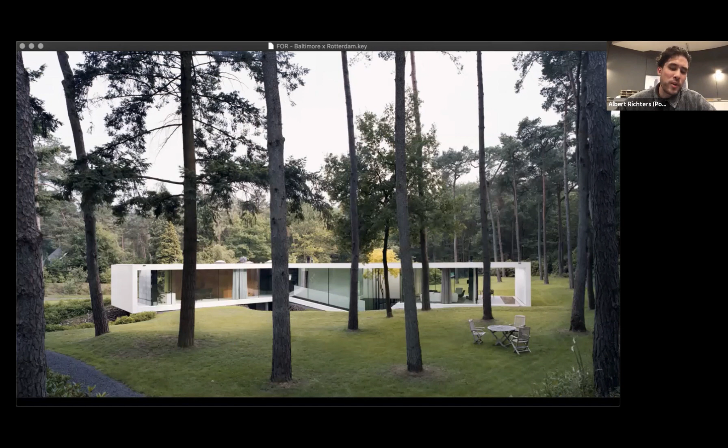We started off when the office was just a handful of people. It all started with this villa here in Holland in the woods. Even though I'm not going to elaborate on it, this villa is actually the start of the philosophy of Powerhouse as a company — that it's not only about beauty, taste and design, but also about how you put it together. This villa was actually the first of those projects where Nanne de Ru was responsible for doing everything from designing to the drafting, the drawings for the builders, and this is basically the project that got it all started.

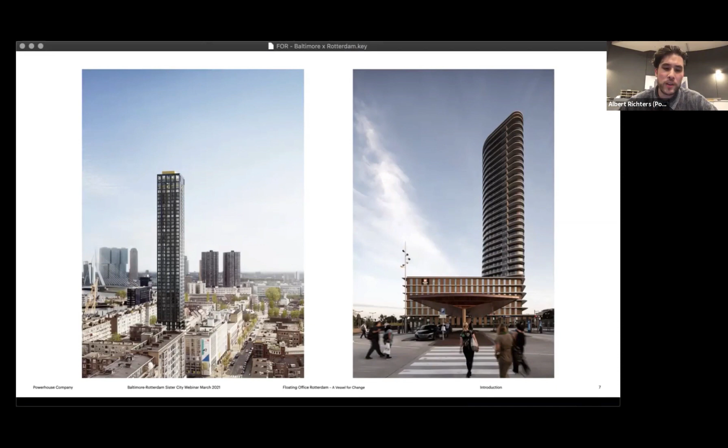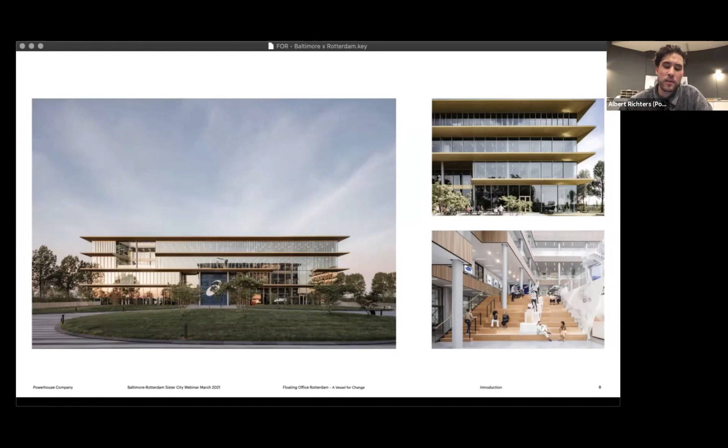Since then, we've been working on all kinds of quite interesting villas, quite interesting projects. But we've panned out, and our portfolio now also consists of inner city developments, high-rise residential towers, bespoke offices such as the headquarters of the ASICS company of Europe near Amsterdam, where this project was conceived in quite a fast way but had to already take into account all kinds of sustainability measures. Now it has been quite a successful project in terms of revisiting what work and the workplace can mean. So in that sense, also a very good and interesting learning moment that garnered knowledge for the floating office in the future.

We've been working on interiors as well for different firms. So basically, we've slowly panned out to have a very diverse portfolio in which everybody works not only on the design, but all the way through to detailing and so on.

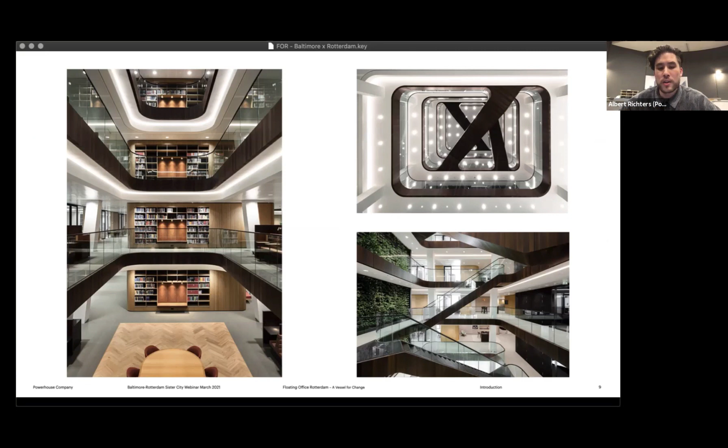Besides that, we also had the great opportunity to work on some icons in places around the globe, such as the Çanakkale Tower that I personally worked on back in 2014. This was done in collaboration with a small architecture firm here in Rotterdam called International Design. To our surprise, we won this project somehow based on a very beautiful painting, inspired basically by a painting of Çanakkale that the mayor had in his room. So Nanne, with his smart thinking, basically thought, well, we have to present it as a painting, and then it will be a success. And so it came to happen.

It led to other kinds of loops, not necessarily based on exactly that same philosophy, but we recently finished the Loop of Wisdom in China, which is actually a sort of information pavilion for a new neighborhood that is going to be built there, which will in the future also house sport facilities and education facilities. So these kinds of icons have been quite important in flexing our muscles in terms of design and also seeing them be executed.

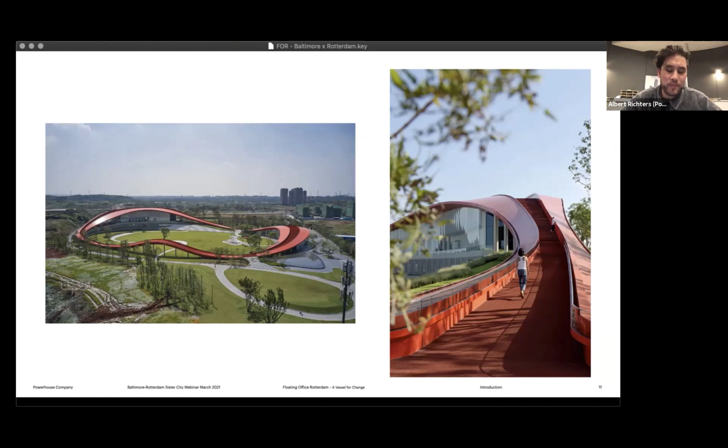Back here, we've also recently won a project for a pavilion in The Hague for the forestry, and it kind of symbolizes somehow the ending of 2020, in which we've been developing a lot of projects in timber.

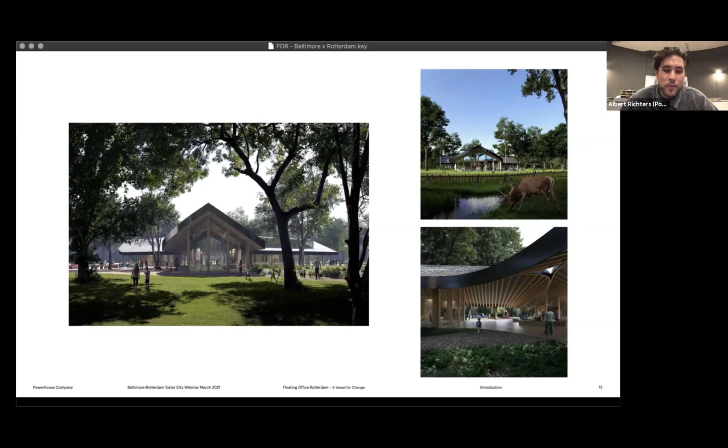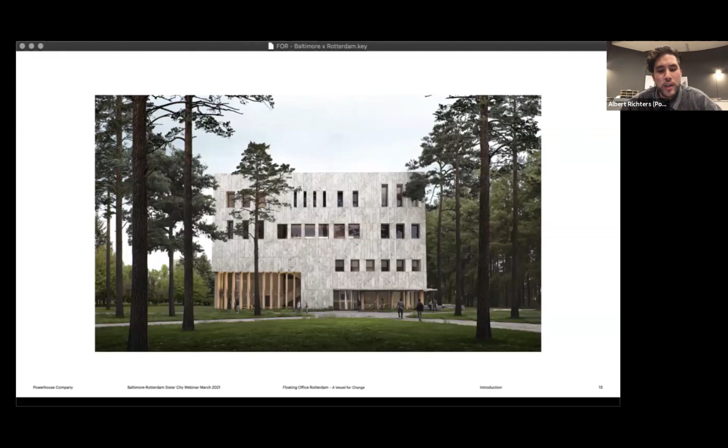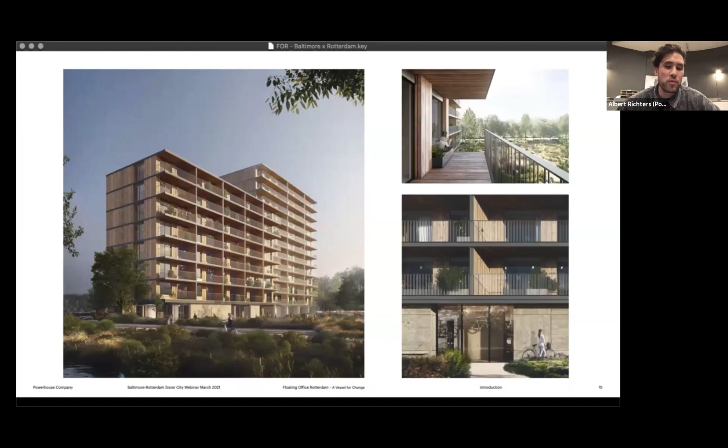And then also we're working on a social housing project that is made in timber. It's basically a refurbishment of an old flat in a neighborhood in Rotterdam, where we basically are using timber to build on top of existing foundations. And here the main discovery is that timber is much lighter than concrete or other more conventional materials, and therefore you can reuse the foundations of a building to build a completely new housing block on top of it, which conforms to all the standards of living. We do it together with a landscape designer, in which not only the living but also the landscape around it are completely integrated as a whole. So again, there's a degree of experimentation going on, and our last year has been quite dense with these timber structure buildings, and I think that's a very exciting chapter that we're now entering. Something that is also new to us, to be working with this very new material.

Going back here, as I said, this whole team, we're all doing it together, and it consists of not only the designers, but we also have all the draftsmen and all the engineers in-house. So apart from having advisors on board and consultants for the different technical aspects of building, we in the end make sure that all the shop drawings get made, and I think it's quite an amazing feat that we are able to do that, and it also keeps us on our toes. Vice versa, as an engineer or as an architect, to keep in mind the certain stages of a project and how these stages come together, basically in keeping with the philosophy that got it all started, way back when the Villa 1 was built, the white one we saw in the forest at the beginning.

Anyway, moving on to the project. I actually wanted to put the project in a much larger context. So we're now going to be zooming out a lot and then zooming back in. I will get to details, don't worry.

But I just wanted to start with, since we're talking about the sister cities, a quick comparison of Baltimore and Rotterdam. And what I found quite interesting is that if you look at the current cities now, you see somehow a similarity in atmospheres where the former harbors have turned into recreational spaces, recreational places, symbolizing how the cities have grown, the harbor functions have developed and perhaps moved out or have shrunken or grown in a different way. This brings with it a kind of renewed thinking of water and the city, and the heritage of the city, the history of the city, and how we deal with that and what that could mean within city life.

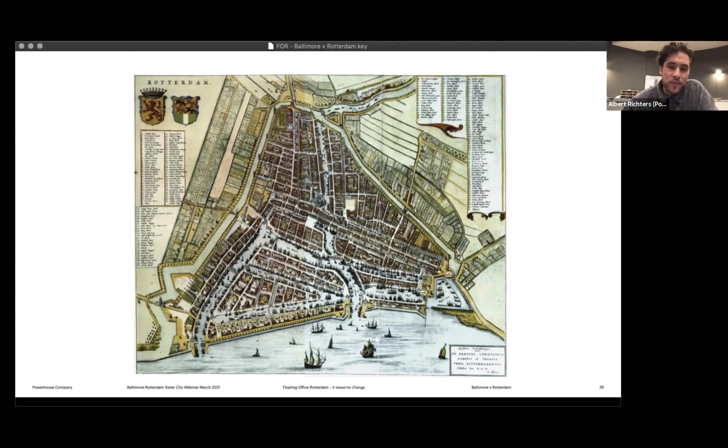So moving back here, Rotterdam was much smaller back in the day. And if you overlay it with Rotterdam now, basically on the top left corner of the old map, you find the central station, and then this twisting Maas River running along the south side of the old center, which is basically now completely part of the city.

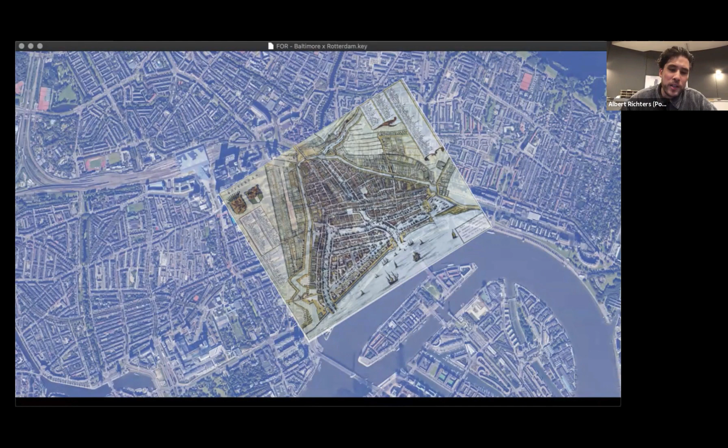And if you zoom out further, you find that the city has grown quite considerably to the south. So what that means is the harbors that used to be part of the city, now embodied by the city I've just shown in images, are much smaller than the harbors you see now. For instance, on the lower part of the screen, you see two big basins.

One of them is called the Rijnhaven, the northern one, which is this following image here. So to your left, you see the Rijnhaven, and this is basically the location of the floating office that I'm going to discuss. What's important about the Rijnhaven is that it's actually along an axis of city developments. As I mentioned, the city grew all the way down to the south.

And the south, in terms of amount of residents, is much larger than the north side. It has its own center, but they have not necessarily been connected that well, obviously because of the huge river and the water and the harbor functions in between that have only moved out quite recently.

But now the city has this vision, the so-called high-rise vision, that is trying to tie the north and the south together. And what that means is that the Rijnhaven, located right in the center of your screen, becomes a new center in itself and becomes a new place, a new development within the tissue of Rotterdam.

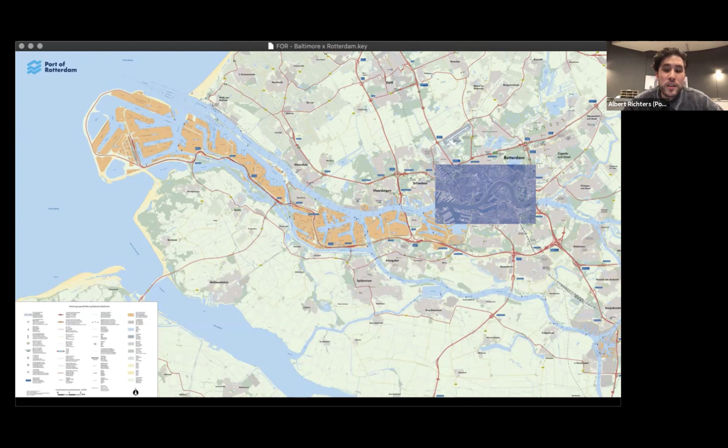And it's even growing, and even though it's not anymore the largest harbor of the world, it's still trying to profile itself as the most high-tech harbor, the most innovative harbor.

At the same time, still having this relationship with the old city, and the old city still having to deal somehow with traffic that goes back and forth from the freight terminal. So the freight gets transferred to smaller ships, river ships, and the Maas is still very much and very intensely used for the harbor function in the end.

And that's, I think, something that is a bit different when it comes to Baltimore, because this whole Maas is a very long river that still has to function as an important port. And at the same time, there's this whole sense and movement of how the city should basically be.

First of all, it should deal with the local ecology. As the harbor grows, there's more questions about how the harbor deals with water, how the harbor deals with nature. And at the same time, as the harbor moves out of the city, there's also a lot of question about what do we do with these remaining harbor functions, or the remaining basins that now become new spaces for living, new spaces for recreation, and obviously new spaces for nature.

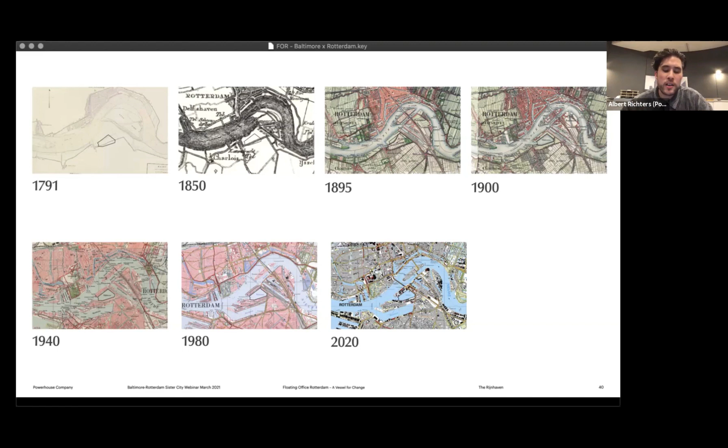What is interesting about it is that it's not a basin with parallel quays. It actually has a different shape, as you could see in the previous image, and this different shape, where you don't have parallel sides, makes it a very interesting space as an urban space.

With the new ambitions of the city, not only to grow south but also to integrate nature and city life into this new zone, the Rijnhaven is a very interesting space, because it's not only a new scale for the city to encroach onto the former harbor function, but it's also basically a new testing ground. That's how this whole GCA, the floating office, fits in.

At the same time, it has also been a place of innovation for a long time. After it was dug out, it was basically the first electrically driven harbor in Rotterdam, or actually in Europe, which was already an innovation.

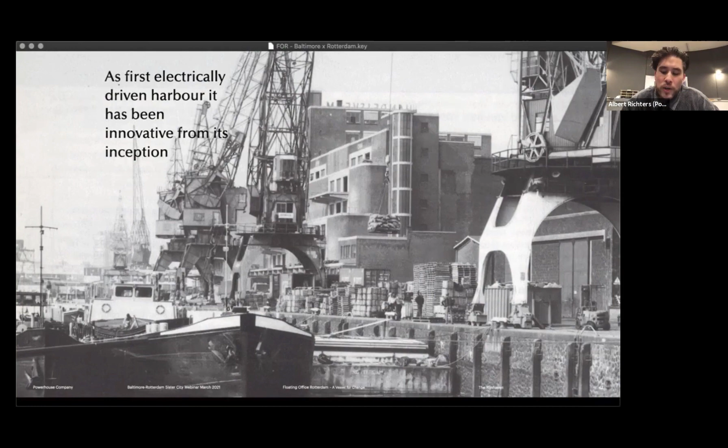This started in the 90s, and something that was maybe less taken into account was how to deal with this large scale in regard to the tissue on the ground, what happens at the ground floor levels and the urban life. Since it was a completely new frontier for the city, there was a lot of architectural experimentation, but not necessarily a good connection with what is happening on the ground floor.

That's something that is now starting to change on the other side of the Rijnhaven, where you have, for instance, the Phoenix Lofts, built on top of an old storage building. In the development of that project, there's been much more attention to not just building a huge amount of housing and then thinking about the public space, but doing that all together. So this area, even though it's maybe not yet a fully fledged center of Rotterdam, is already a place where new experiments and investigations are taking place on how to deal with city development as a whole.

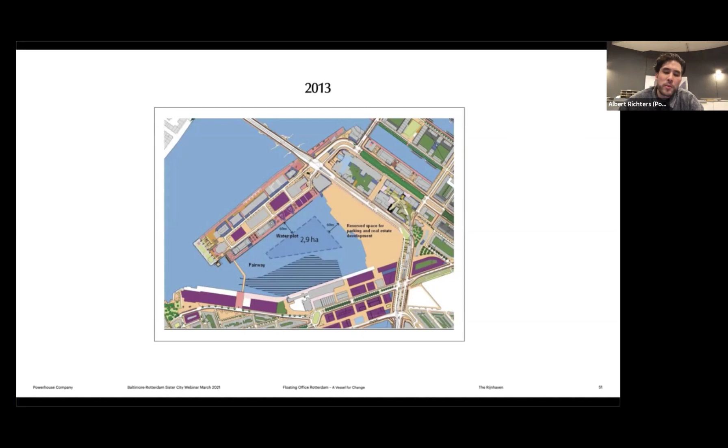But the ambitions for this place are huge, are large, and are about making it part of the city again. So how does that happen when there is this one factory that kind of blocks development because it's still functioning as a harbor? That's kind of where the situation now is, but where we also played a role.

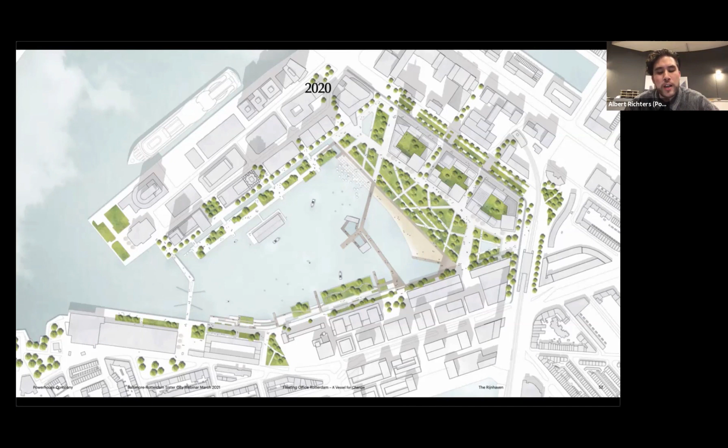So as you see here, this is the final master plan that was presented last year for the Rijnhaven, quite ambitious. It follows the idea of coming closer to the water, integrating nature and making for a livable space surrounding the harbor, and also being able to add large-scale developments surrounding it, to deal with the stringent need for housing in the city.

Then there's the GCA, as I mentioned. The GCA, as was already explained by Rachel, is the Global Center on Adaptation. It was initially started by Ban Ki-moon. It was a result of a collaboration with the Dutch government and the United Nations during the Paris Climate Summit, where the Netherlands decided to initiate the Center of Adaptation, formerly known as the Global Center of Excellence on Climate Adaptation.

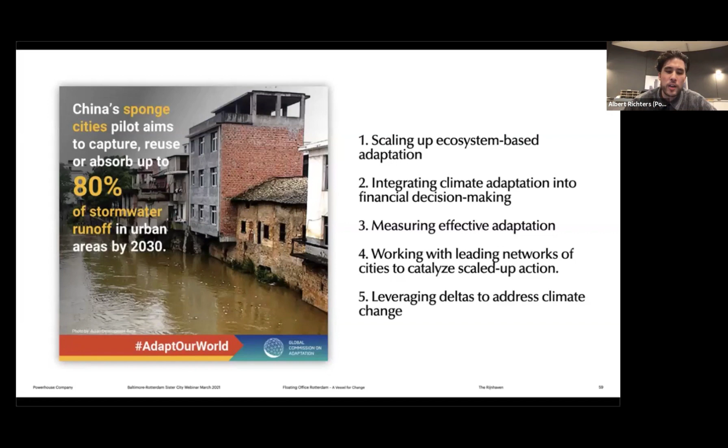Last month they did a climate summit, but basically they have these five ambitions where they want cities around the world to work together to exchange knowledge, and they do it with lots of partners. They have research papers, and basically it's sort of a knowledge sharing center where solutions or problems are measured and dealt with through this central headquarters. At the same time, they try to find partners, financial partners but also governmental partners, to create a network around the globe in which climate adaptation or resilience is put on the agenda as much as possible in policies and all kinds of things.

So in a way it makes a lot of sense that Rotterdam did this bid to attract them to the city, following what I just explained regarding resilience, nature, and so on. They won the bid together with Groningen, which has the Energy Academy of Europe, which is more of a research-based center where innovation and research take place in terms of adaptation strategies. So together they won this bid, but they also got the promise of having a floating office in Rotterdam.

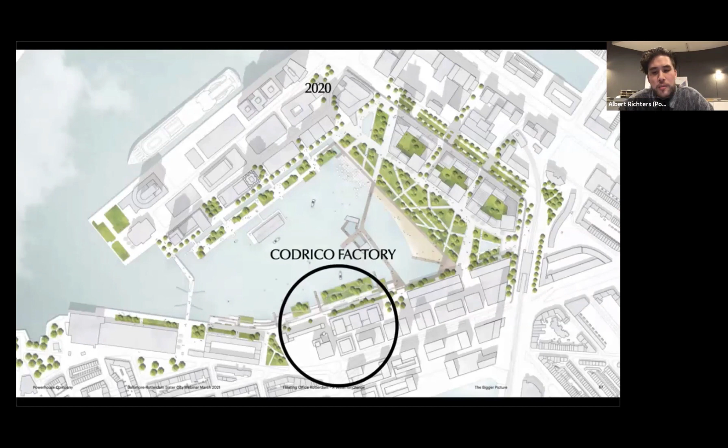And then there's Codrico, which I mentioned before. That's this factory, and it's actually another master plan within the master plan, a vision that we have been working on as Powerhouse. It consists of this one remaining factory that is still functioning. It's basically a factory that does all kinds of things with corn, for cereals, for pet food, all kinds of uses for corn.

You wouldn't expect it to be the case, but this factory is quite high tech on the inside. But as you can see, it is quite an old structure. It actually comes all the way back from the 1930s, if I'm correct. Part of it is even a listed monument, and then slowly it has been expanding as a factory. The fact that it's a monument also means it has to be preserved and taken seriously as a building, because as you can see, it's a very iconic building with an iconic presence in this harbor.

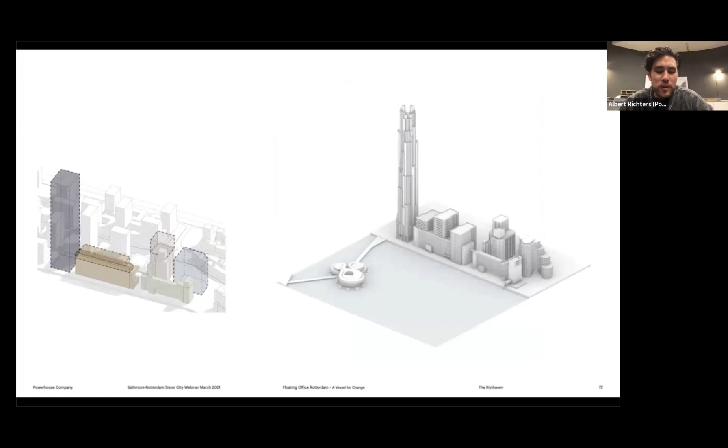So we've been working on this master plan. I will not go through the details, but we've been working on it basically since 2017, so already for over 3 years.

As I mentioned, it's the one remaining factory that will fulfill the ambitions of the municipality of being able to have this promenade surrounding the harbor, making it an integrated part of the city. So they needed to come up with a strategy in which the factory could move out in order to unlock the full potential of the Rijnhaven.

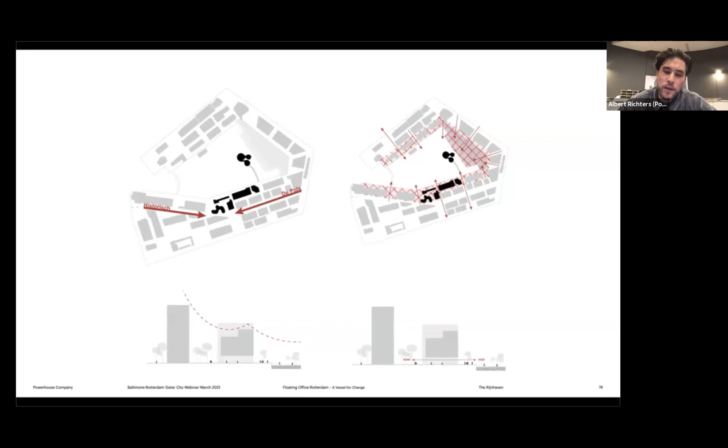We worked on that development, which is a new frontier where an old part of Rotterdam is going to be part of the city again, south of the Maas, that expanded hugely the moment Rijnhaven was dug out. It was the first settlement, the biggest settlement of Chinese in Europe, in the beginning of the previous century. It has an old center, but was also placed right next to quite heavy industry.

This is what the vision now looks like after we also played a role in it. Pretty much in the center of the screen, you see the Codrico master plan in the model. But how does this connect with the floating office, you might think, because it might seem I'm dodging the bullet—but basically this is the issue.

We've been working very closely with the municipality. We've had many workshops with them throughout these past years for the Codrico development. In doing so, we've gotten a good feeling of the ambitions of the municipality, what they're looking for. And since we've been in close contact with them for this development, it has strengthened our network with the city. But this network is actually held together not by architects, we wish.

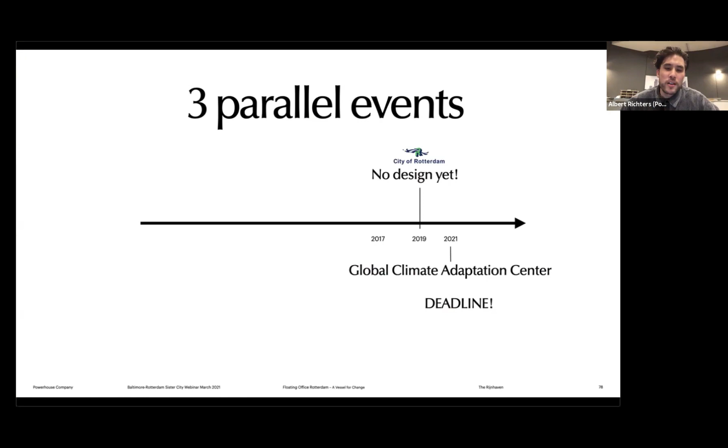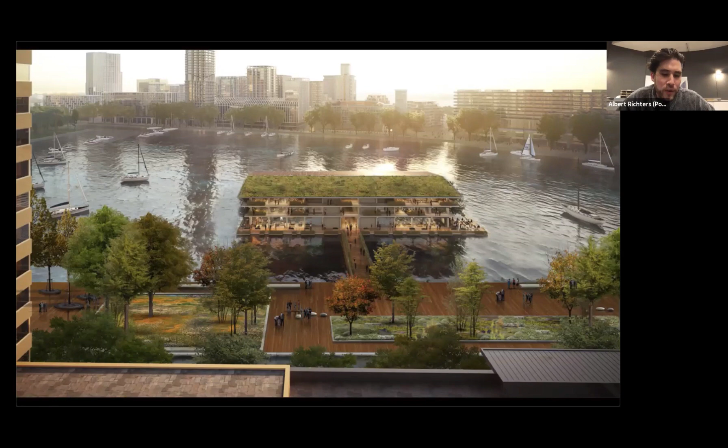Sorry, I'm flipping back and forth. So that brings us to the floating office itself. Here you see how the floating office is attached to this green boulevard, which is also going to be floating. This is a first impression of how the city is coming onto the water, where the height difference of the quay, which fluctuates between let's say 2 and 4 meters, becomes much more tangible and reachable because of floating structures around the Rijnhaven, with which you can sit on the edge and touch the water. Something that has proven very difficult in Rotterdam, and something that is very needed within this bigger vision.

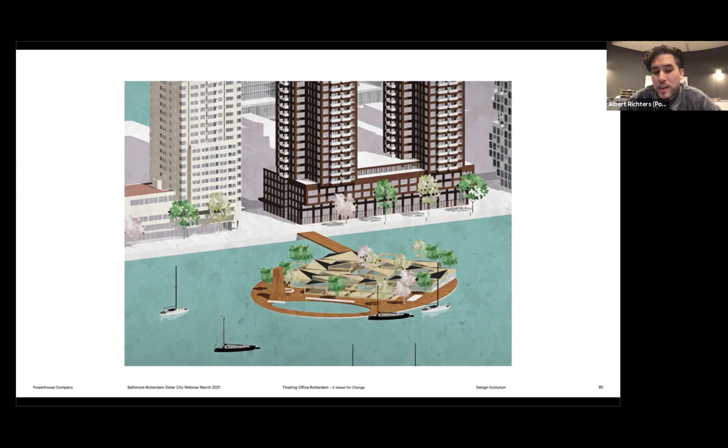But if you see the next slide, which is a completely different proposal, the follow-up proposal of this, you notice that the architect part is not yet the most essential part of this huge culmination of forces, basically.

As you can see, it could have been this, it could have been that, and they would have been happy with it. It all comes down to schedule, it all comes down to organization, and it all comes down to trust in the organization to make something happen.

Whether it's this design or the other design, at this stage didn't really play a role. That's why we could come up with something completely different, such as this, and they would still be kind of happy with it.

The reason we came up with this is because we had to get it floated into the Rijnhaven. It's quite funny that this process went so fast that we only had a few initial sketches for this. These were sketches drawn up very fast to just set the base, the basic idea for the concept, for the design. But it actually is at the core of what became the floating office in the end.

So here you see the necessity to be able to float the building in and out of the harbor, and that has to do with the fact that the agreement with the municipality is that this is a temporary building, that it will not necessarily remain in the harbor for an extended period of time, but let's say for now it's a 10-year period. But also, since it was floating anyway, and since it had to be a floating office, we needed to be able to transport it.

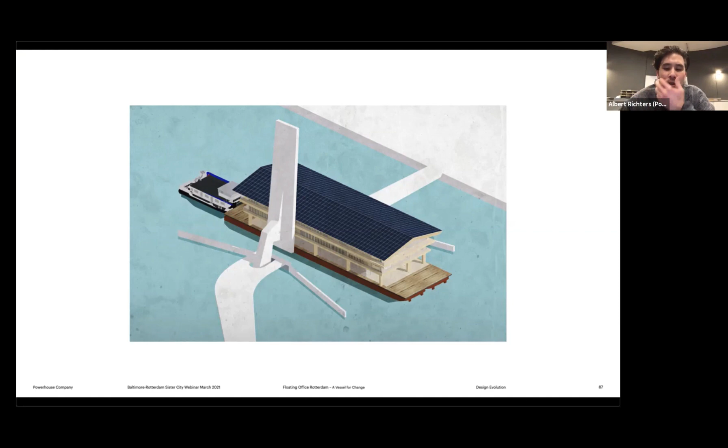But thinking further on that note, you see that it's basically being placed on old steel barges. The whole idea back then was to make a kind of foundation of old push barges that are being used by the shipping industry at the moment, and then use that as a foundation. But that dictated a lot for the design, in the sense that these push barges have certain dimensions, certain standard sizes, and so on. So that was maybe a sort of clumsy, or a naive first thought of how we could deal with this floating structure.

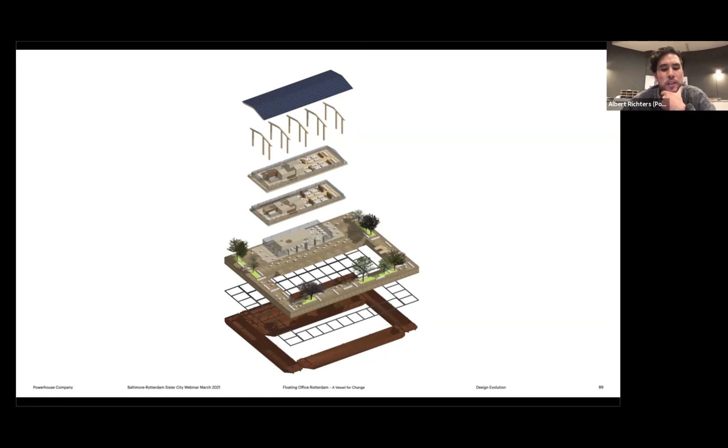In the end, this is what it looked like, and as you can see, it felt like a longhouse, a wooden longhouse, light structure on top of this big terrace.

And in it, you already find some concepts that then in the further development of the design took place. So what you see, for instance, is the length, obviously, so that it could pass through the bridge. That's a given. We see on top, on the roof, the idea of having solar panels. That's actually the main reason to pitch the roof, not only to give it a friendly presence, but also it helped us angle the roof towards the south sun.

We wanted to have that roof as a sort of full solar panel, edge to edge. So those are initial ambitions, as well as the tapering of the floors. You can see also in the elevation, floors tapering out. So the farther away you are from the public spaces, the more balcony you have, so to speak. At the same time, the balconies help to control somehow the climate within, since it's quite a glazed building, something that you already saw when I showed the ASICS headquarters, the fact that basically we wanted a very light, transparent, and open building that needed to deal with sunlight and so on.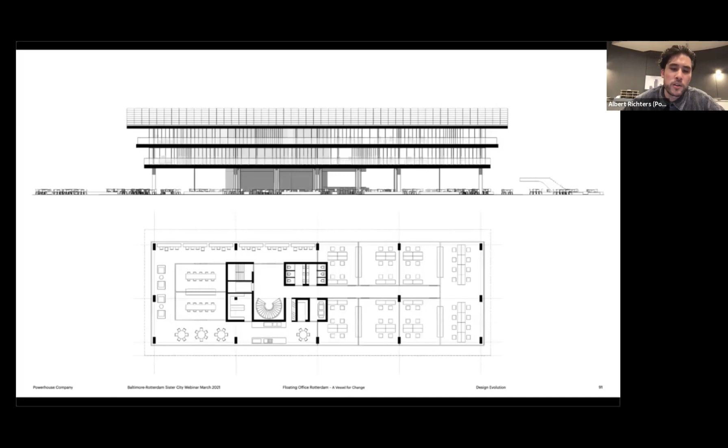And back then we had this sort of interesting roof shape. We thought that the roof shape was the iconic part of it. The roof shape had to be this sort of slick and high-tech wing. Those were sort of initial ideas that we were thinking of back then. Not a lot of columns, as you can see, huge spans, but also a little bit random, you could say.

And this you can see also when you look at the design, there's many things going on, and maybe you don't see it yet because this is the first impression, but I definitely see it. As we go further, you will see how this design evolved in order to become stronger in its presence.

But we were looking for something, even though it was floating, we wanted something elegant, something with a very representative presence, since it was going to be the headquarters of this very representative organization. One of the things we always came back to, and I think one of the inspirations, is the house along the party wall by Herzog and de Meuron. Using wood, and maybe also because it's one of our first projects in wood, we wanted to explore how to make this wood really be the star of the show and the defining element for the building.

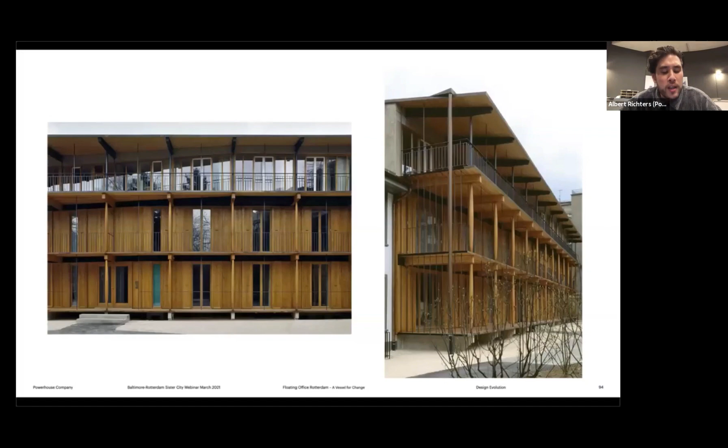I think this is one of the references that came along during the design thinking process, where we thought that this kind of putting together of elements was a very important aspect for the building. Thinking further on that, you'll see that because of that, the design slowly evolved.

Here I show you a previous design where we have this sort of sleek roof. I mentioned it was a bit random, so we thought, let's bring it down to its core elements, where we talk about a frame of wood and glass in between. That led to this design iteration, in which this frame would be a sort of super grid on 3 floors, very emphasized not only on the inside but also on the outside, still maintaining the concept we initially had of this long, elegant gesture.

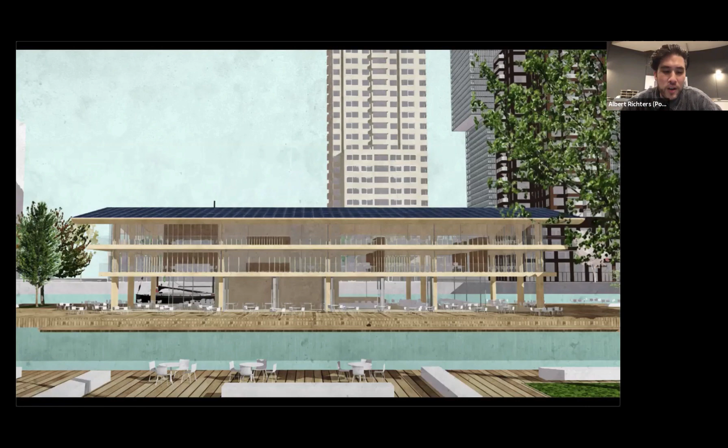If you compare where we started and see the evolution, you see how much stronger the design got—at least that's how I think of it, but I'm curious to know how you see it. Obviously there's a change in render styles here, so we should look past that. But I think the presence got much stronger because we brought it down to its elements.

You see how this translates into a 6x6 grid on the interior, which might not be the most conventional office interior, but it gives a lot of neutrality to the space, and because it's so neutral, it allows for many different uses. The lines may not be that clear on screen, but the grid allows for a nice, elegant space and flexibility. And because it's slightly bigger than your conventional office grid, it also feels more generous.

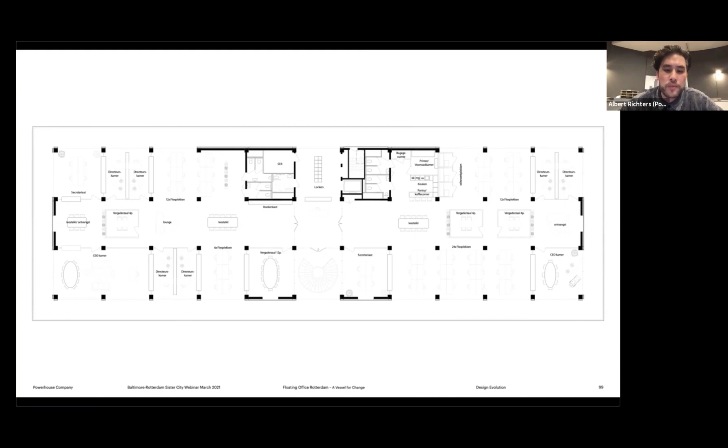The funny thing is that around that time, I had a school trip for TU Delft to Vienna as a tutor. This was the first time for me to experience the tiny Loos bar, the American Bar in the center of Vienna by Adolf Loos—a bar of 4 by 6 meters, literally, and that's all you see. But it seems much larger because he finished the top half of the walls with mirrors, and in a very intelligent way placed this grid structure made out of natural stone and marble. It's really quite spectacular over this small space, and the effect is amazing—you feel like this little cube in a matrix, an infinite grid that makes the space feel so much larger.

Even though our building is completely different, it's funny that the moment I experienced this space, I felt super convinced about using this grid in our building too, even though it was a completely different purpose, a completely different situation, and not introverted at all. Just the fact that this grid was so strong here gave me the confidence to go for it in a building. It's funny that these two events—this school trip and this design process—went together in that moment.

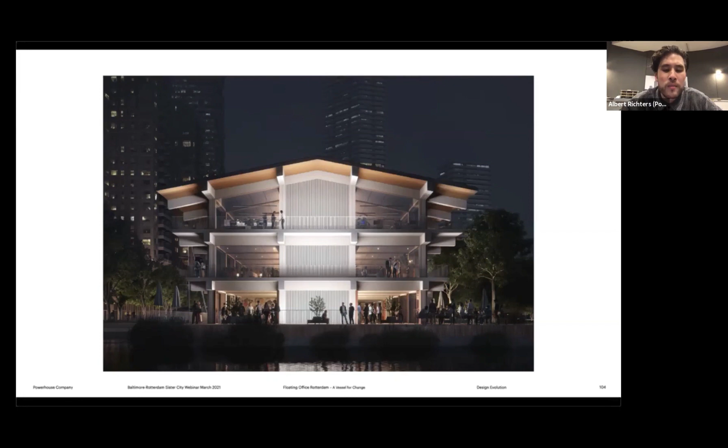And what you see also is the use of symmetry. Symmetry is a thing that happens not necessarily from an aesthetic point of view in this case, but definitely from the point of view of the fact that it floats. The moment the weight is not distributed evenly or symmetrically, you have a lot of technical issues to deal with regarding the weight and how the building floats. Of course, we don't want a slanted building, so you would need to add ballast, but that ballast is actually dead weight you don't really use. So symmetry was always not only an aesthetic choice, but it made sense for this particular purpose.

Here we see some details, basically the section of a floating foundation of concrete with the grid structure on top. I mentioned concrete now, whereas previously I mentioned steel barges. I also mentioned that steel barges were difficult to use because you need to maintain them - they need to be pulled up onto the shore every few years for inspection. And obviously, if you're using second-hand ones, it's never guaranteed that they will actually be proper enough to hold such an important building.

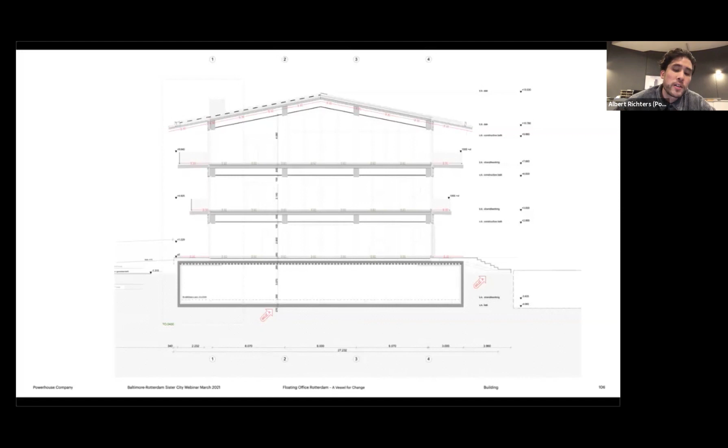So with a little bit of pain in our hearts, we decided to go for concrete, but we also discovered that concrete had a lot of potential in terms of climate management for the building. These concrete barges, which I will soon show you in a video, have integrated within them a whole tubing system that makes sure the temperature of the water is transferred into the cooling of the building, and therefore can cool the office functions. With offices, the cooling load is usually much higher than the heating, the temperature load of cold air, because you've got computers and people there, and that's why cooling is much more important. When you look at the yearly schedule, cooling of the building is much more important, and therefore it made a lot of sense to use this concrete foundation as basically a heat exchange for the building, and that's what you see here.

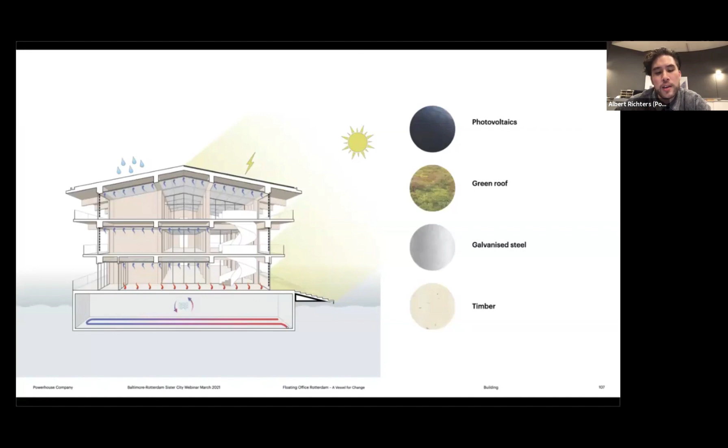This, in combination with the timber, which is produced completely sustainably in Germany and then built on site - it's prefabricated in elements and then put on site - in combination with a vast amount of solar panels, makes it a completely energy neutral and CO2 neutral structure, as well as having a very friendly, warm presence seen from the water side.

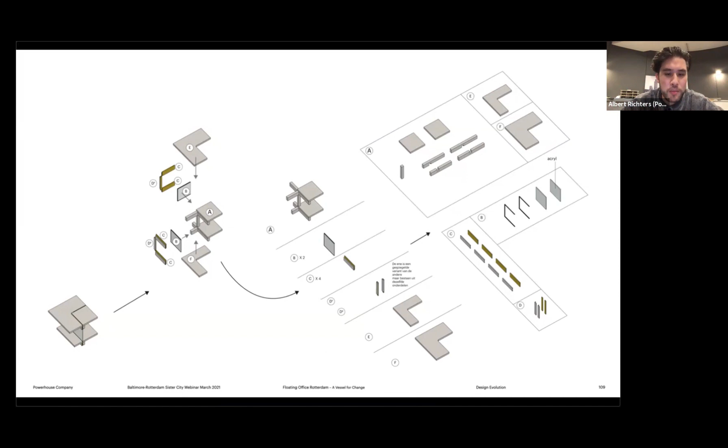And then again, here we have a basic sketch of how we were thinking of putting these elements together, where you have a sort of core structure. And then on the core structure, you make windows with bespoke frames that you then clamp with facade elements, cladding onto that structure. We wanted to keep it that simple, and in the end you'll see that we managed to do it like that. This is one of those detailed drawings I made way back when we were thinking about how we think of these details, and how we think of putting the building together.

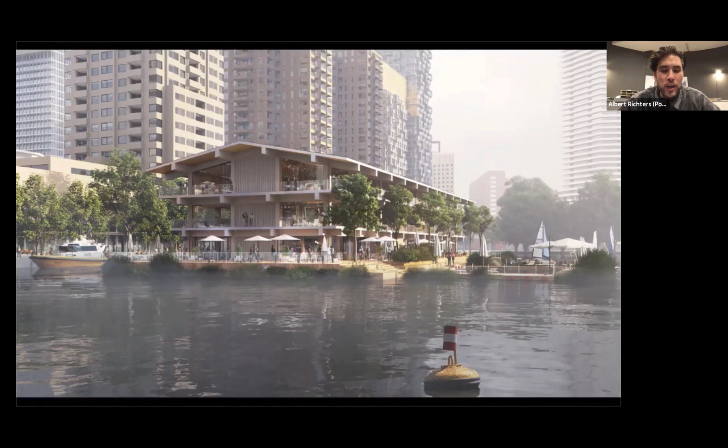And here you see the scheme again of all these layers stacked on top of each other, on top of this terrace that arrives at the water, making it quite a presence on the water, but at the same time still somehow this island where you can have a much closer relationship with the water, on top of the fact that when you work there, you can still go outside on every floor and walk around the whole building. That makes it a very friendly and welcoming building.

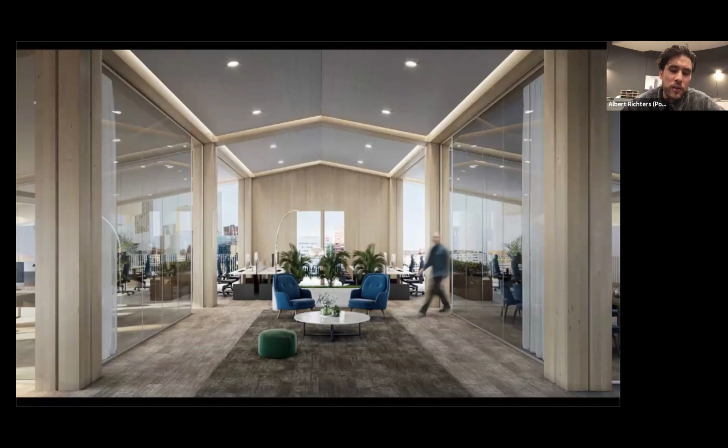And what we were looking for in the interior is - instead of actually, I think one of the interesting discussions we had when it came to the interior is, do we have tables that come up and down for people that want to work standing or sitting?

Or do we work smartly with the spaces, creating variations where you can actually move when you're working on a laptop, where you can work on a standing table or sit in a sort of cafe atmosphere. We were rethinking this in a way of being down to earth about what work means in such a building, rather than focusing on gadgets that only solve minor problems in what it means to be working in a space like this. I think that's an interesting given about the workspace.

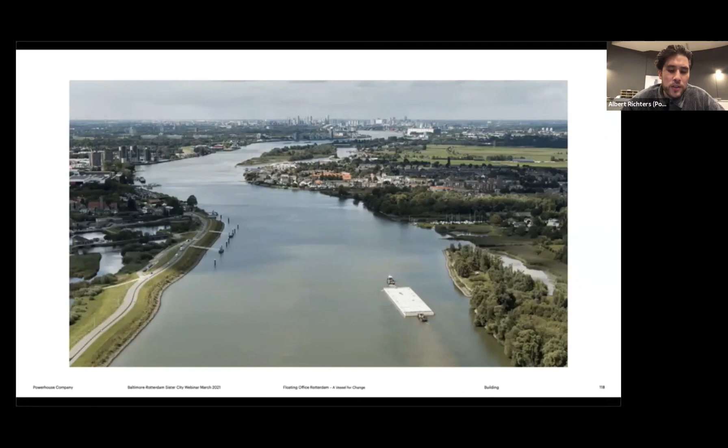So last part, the building itself. It's getting built now. We started this end of 2019, and now the building is already quite advanced, as you will see. It came with a degree of tension because, as I mentioned, we needed to get this office, this floating island you could say, into the Rijnhaven. So I'll show you a little clip of how that went.

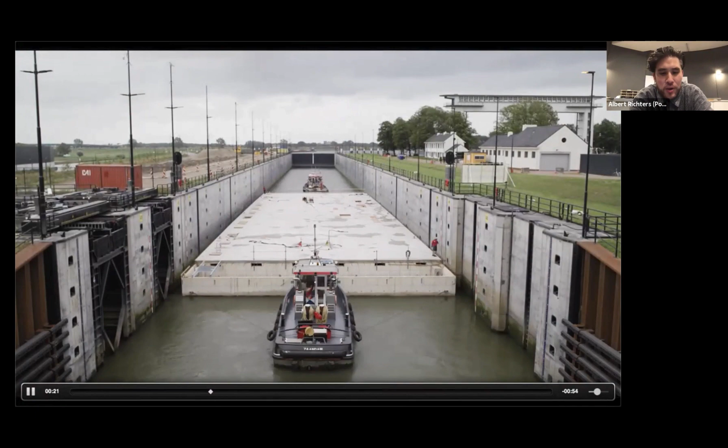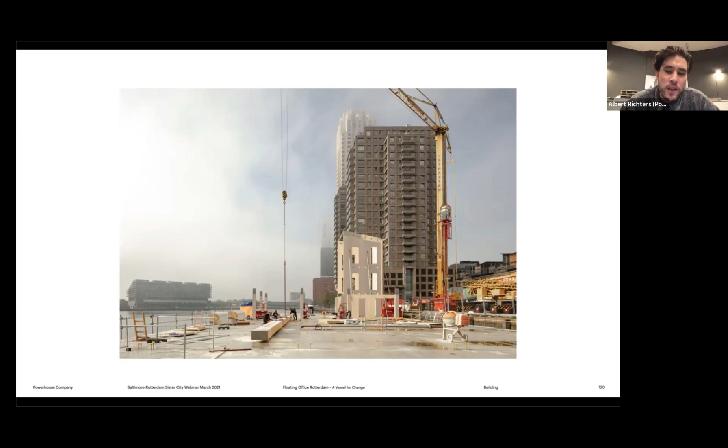And as you can see, once it came in, the building could start. Here you see how the first elements are being put in place. I mentioned that the wood structure was prefabricated offsite and then transported to the Rijnhaven, and then hoisted in by cranes.

What I want to mention is that this building method is a kind of novel method that was invented, or named by Nanne de Ru as the HelloFresh model. I'm not sure if you guys have HelloFresh in America, but I believe Blue Apron is an equivalent. I'll try to explain. Usually when a building is built, as an architect we provide drawings to a contractor, and the contractor just puts it together, but always looks for the cheapest option to fit the budget and increase their own profit margins.

What the HelloFresh model does is basically say, okay, these are the ingredients, they're all already arranged. The woodwork is arranged, the glass, the window providers are there, the installation guys are all lined up. Everything is lined up. The contractor just has to make sure they put it together and doesn't negotiate anything, because the whole ambition behind this HelloFresh method is to make sure the quality and standard of building is kept at the level required and wanted by the client, the developer, and so on. So basically all the ingredients are put into a box, all the building materials are set, and all the companies that have to provide the different parts of the building are already lined up beforehand.

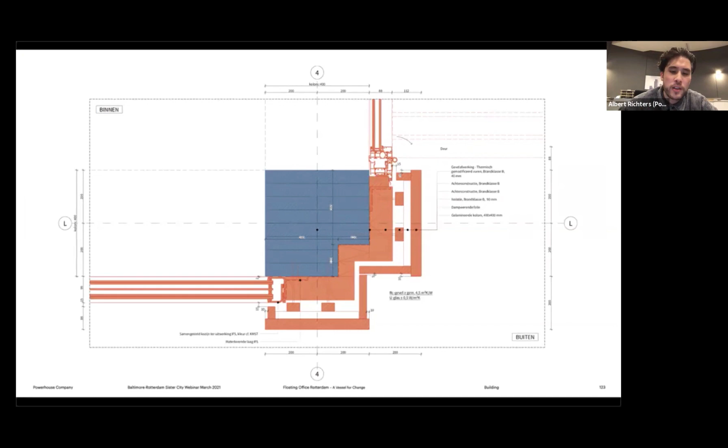I think it's very interesting to see how these different subcontractors come together in a very clear sense. You see it in all these drawings in a similar way. Here you see basically also how it's put on the concrete.

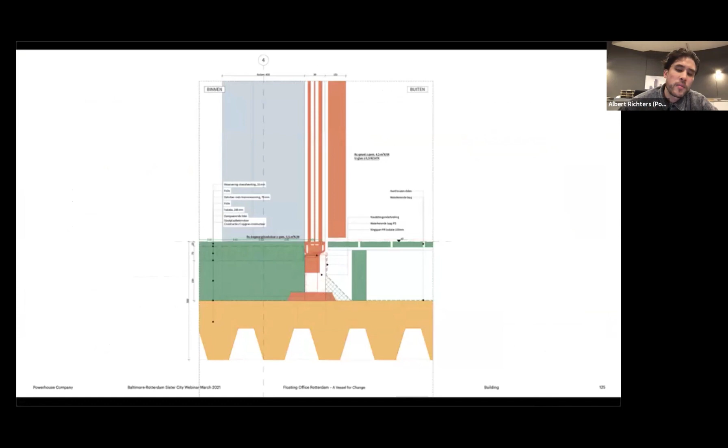This is a roof detail. And all colors have their own discipline somehow. You can also see a little detail here in which, for the wood structure, the gap for the blinds was already made, prefabricated, already defined all the way at the beginning, so that once it's put on site, the gaps along the window are already there to be able to place the blinds.

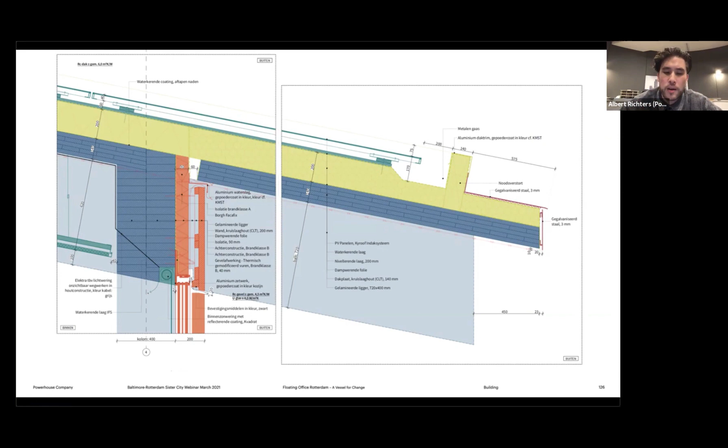The blinds are essential not only for the sun, but essential for keeping the climate of the office basically stable. For instance, during the nighttime, when people leave, the office tends to cool down. So then when you bring down those blinds, you retain heat. And basically all of this works together in an integrated way.

We had to deal with constraints in terms of width and height. As I showed you, the bridge was a very important element, and therefore we couldn't go too high, we couldn't go too wide. But of course, we wanted to retain generous spaces in the floors. So what was important to us is to be able to integrate somehow all these installations into the structure.

Usually you would have the structure and then the installation guy would come in and say, well, we need ducts of this dimension, and we'll just hang them under the structure, and then underneath you will put a ceiling. But of course we wanted to leave the structure exposed, and we didn't want such thick floor packages. So we needed them to work together from the get-go.

Actually, the structural engineer and the installation advisor had to work together to integrate both, because the conventional ducts would never fit within these beams if they were singular ducts, the ones that you would normally have. So the ducting had to be divided along pipes. And then as you see, as the building gets built, it's a lot of handwork in the end.

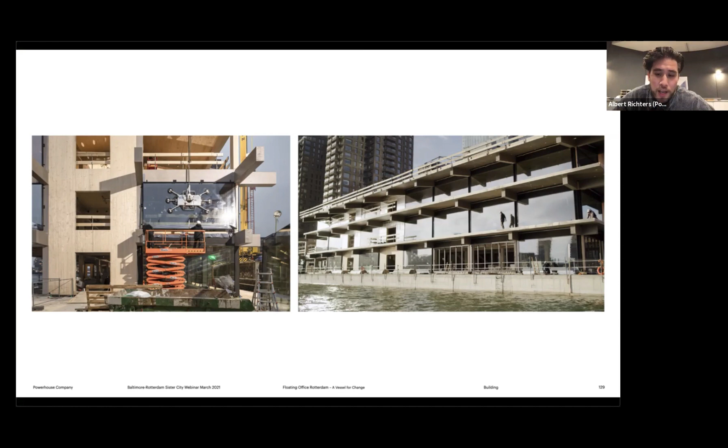And here you see the detail of how the glass is basically just put against the structure and then later sealed with the facade elements. We have, as you can see, these are 6x3 panes of glass, more or less. They're quite spectacular because basically from the inside you get this unobstructed, frameless view. The frame is basically integrated and hidden behind the structure.

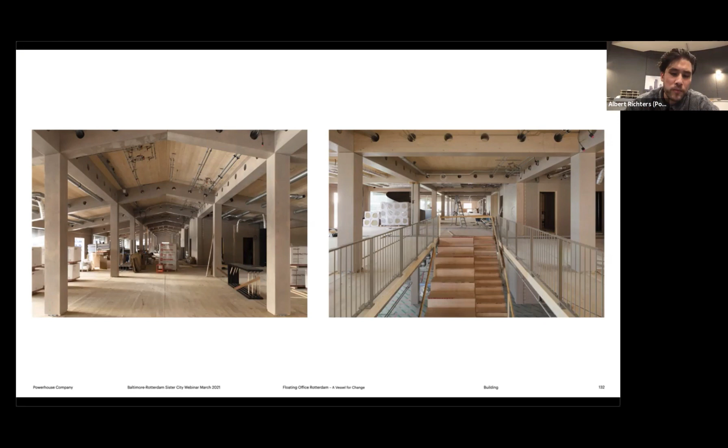That was it, but I'd like to close off with a final video. This was a video that was presented. Sadly, the building could not be officially opened yet. Hopefully that will happen later on this year. But as I mentioned, the 2021 deadline is still there, and we're definitely going to make it. This video was made one month ago for the climate summit that had to take place fully online. Here, Nanne de Ru is talking about the building and what it means and how it's been put together. I wanted to show this as a sort of closing for the presentation.

Wait one second. Oops. It all went so well. Anyway, here it is.

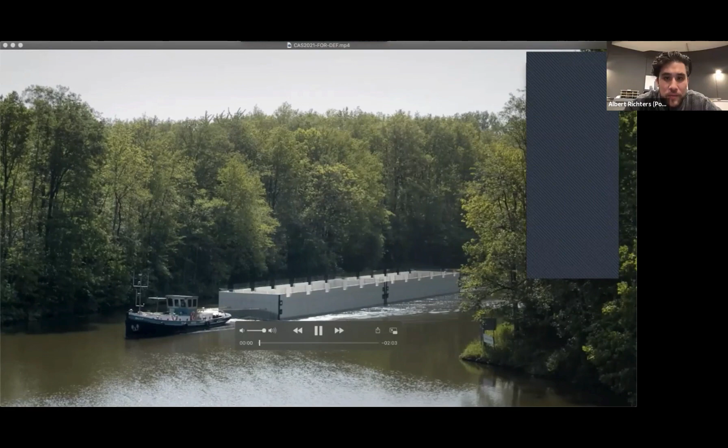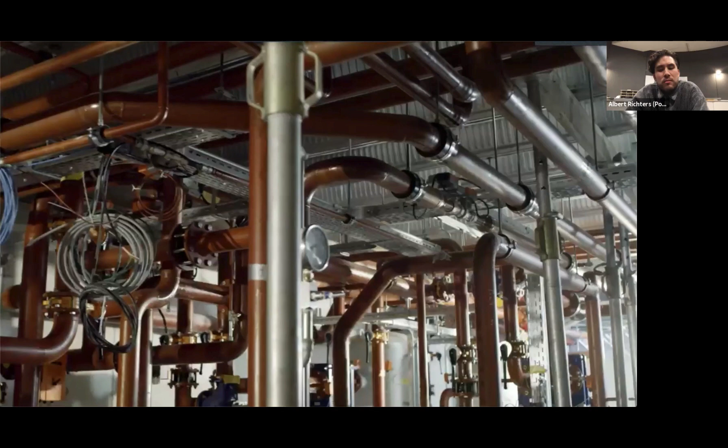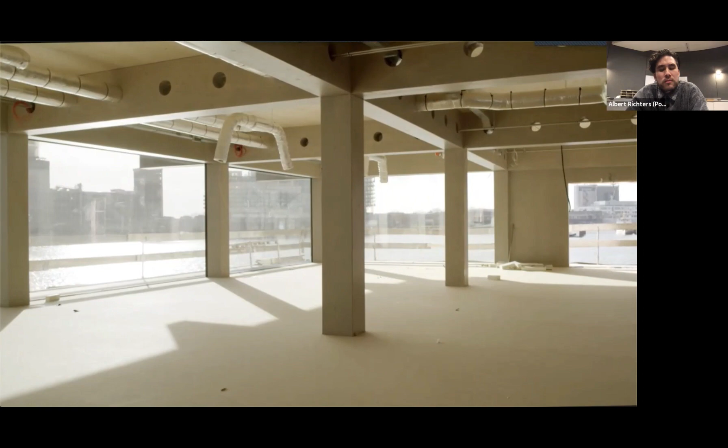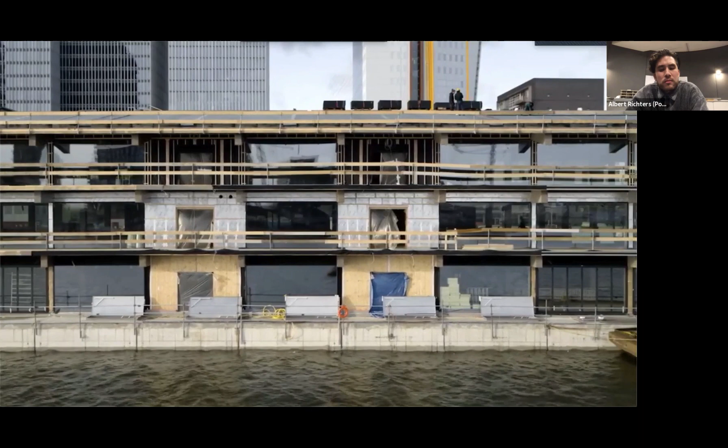How do we make an office building that can adapt to climate change? And how do we make a building that is energy self-sufficient and carbon neutral? The Global Center on Adaptation, the GCA, is an international organization working on accelerating climate adaptation. The GCA fulfills this role worldwide from its regional offices in various countries, and also from its new headquarters in Rotterdam. For that, we are making a new type of building. The new headquarters of the GCA floats on the water in the harbor area of Rotterdam, adapting to changing sea levels. It is energy neutral and is built entirely out of timber. It generates its own energy through solar panels and receives its cooling from the water of the harbor. It is a building ready for the circular economy. And it represents how Rotterdam tackles the climate challenges with bold ideas and with cooperation between citizens, governments, and businesses. We made a building that represents our ideals for a climate adaptive future, and we named it Floating Office Rotterdam. Floating Office Rotterdam aims to be an icon of resilience by design, matching the ambitions of its hometown, Rotterdam. It is proof that we can do things differently today, when we push the boundaries of what we know and what we can. Floating Office Rotterdam, welcoming a circular, sustainable and adaptive future.

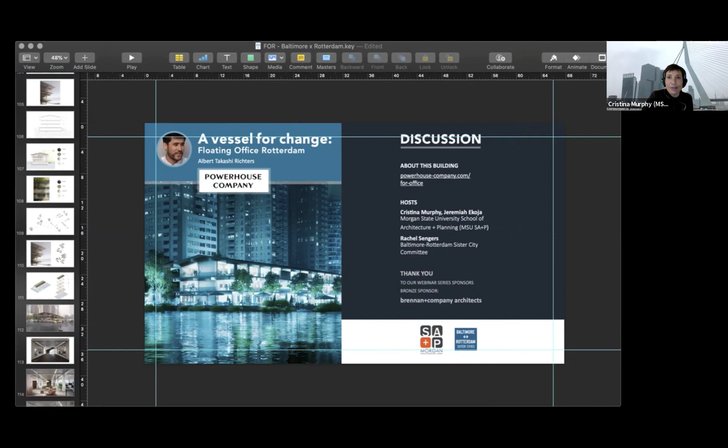Okay, the first question comes from a participant: would it be possible to hear a little bit about the timber structure and the floating foundation? How is it designed to float? If there is a specific species of wood chosen, how is the timber protected from climate and moisture?

Yeah, that's definitely a good question. First of all, it's cross-laminated timber, which is basically pine wood, grown in the forests in Germany. What's quite an interesting fact is that pine wood grows quite fast, meaning if you counted all the forests of Germany together, the amount of wood necessary for the timber office would grow back within half an hour.

So every tree in Germany, or at least every tree purposed for the building industry, is growing little by little as we speak, and basically you have the same amount of timber within that short amount of time. That's a very interesting given. It also means that that mass of timber stores within it an equivalent of 8 million driven kilometers of an average car. So that's basically what we're talking about with timber structure, it has enormous advantages.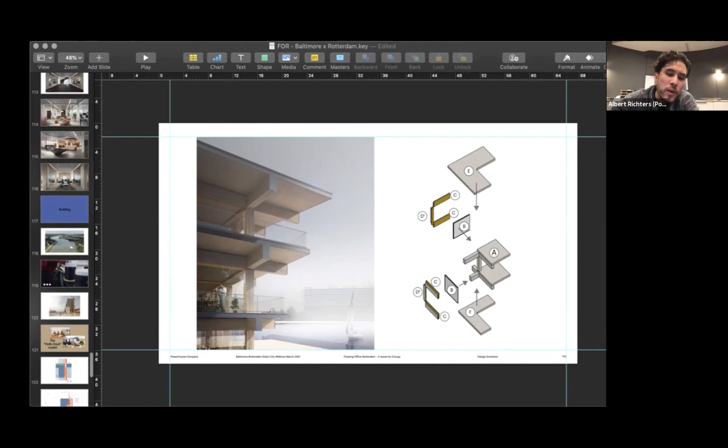Whereas when you leave the beam exposed, even though it might get wet from rain and wind, the fact that it's exposed makes sure that it remains basically ventilated, and therefore the moisture cannot seep into the wood. So this is how we solved that part.

Okay, the next question is from a participant. They say, thanks for a great presentation. The question is, did you study the life cycle assessment of wood due to the relative humidity of the area?

Well, there are all kinds of life cycle assessments made by the engineers involved in the project. I personally have not done such a thing. But as I mentioned in the previous answer, we do these assessments and tests to see to what extent, basically, there is an environmental load from the use of these materials. But also, the whole idea of building in this modular fashion means everything is repetitive.

The beams are all repetitive, the windows are repetitive, the grid is a clear grid. It's also meant to be unscrewed, so basically you can recycle every component of the building somehow. In that sense, the life cycle is extended, but the building is anyway meant to perform up to the standards for at least 30 years. So I hope that answers your question. If you want precise numbers, I'd have to refer you to our project architect, but we do these life cycle assessments along the way, and it's information we keep tabs on throughout the process to also learn.

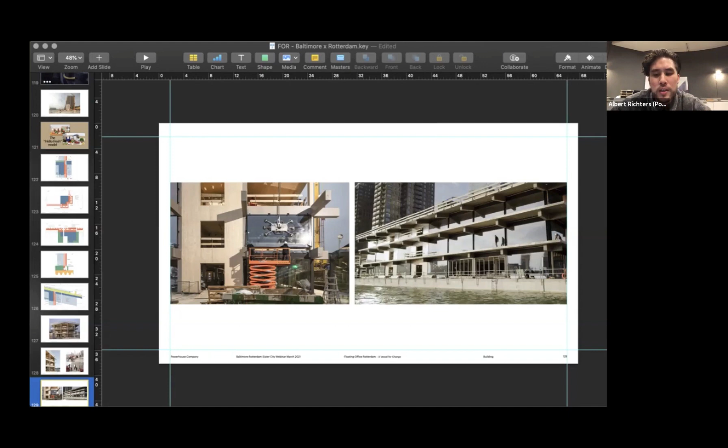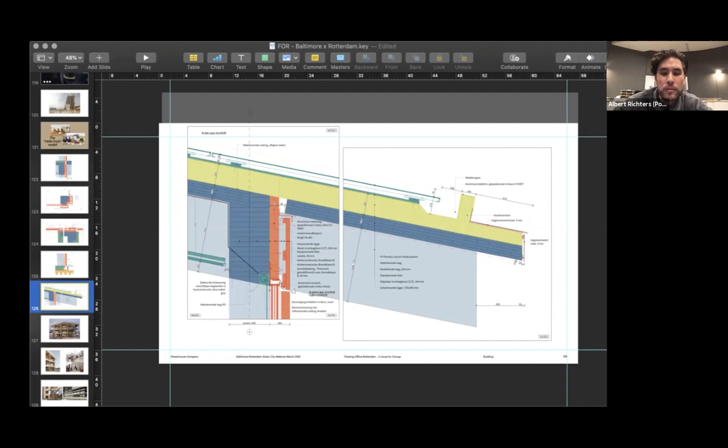The next question is, are the roof and floor elements also timber? Well, the floor is covered - basically the ground floor is covered by a layer of concrete, and of course you need to finish the floor, so in the end it will be finished with thin concrete and carpeting. But basically all the floors, roofs, everything is made out of timber. You can see it here - the blue color is all basically wood, and it's all cross-laminated, as you can see. So yeah, full timber, as well as here in this picture, you can see it.

Okay, the next question is, can you talk about how the concrete interacts with the sea, and if at all, how the concrete is treated on the sea-facing sides?

Well, I guess you're talking about the sea in terms of the fact that this is indeed a tidal water, so the building will be going up and down with the tides. With the lunar tide, the difference can be up to 2.5 meters, I believe. But on average, on a daily basis, the building goes up and down about 1.20 meters - I don't know what that is in inches or feet, so you'll have to look that up. The concrete is basically made waterproof.

The water itself is not fully salinated - it's brackish water, because Rotterdam is located in an area where the seawater and river water come together. So in terms of salt, I don't know the precise details, but that doesn't seem to have a great effect on the concrete basins.

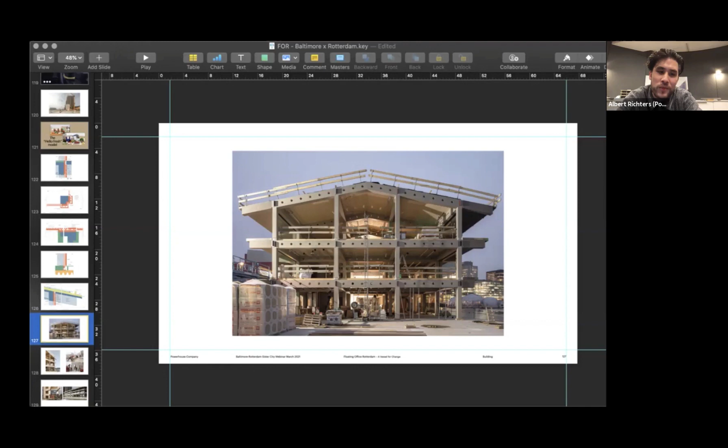And the next question is: I noticed a structural wood that holds the floor slash roof, and the rendering is gray slash white. You mentioned that the design idea was to really show the structure to its core, so I was wondering why the aesthetics of the structure was not shown more as rough timber, to create awareness that it actually is timber.

Okay, two good questions. The first one is quite a big question. Well, in a way, when it comes to the floating office itself, the amount of PV panels on top — you're talking about an area of basically 11 by 70 or 80 meters, so it's like 880 square meters of PV panels on one half. They provide enough energy to power the building itself, but also a surplus.

I think because the connection to the municipal networks has not been made there yet, it will take a little longer, obviously, because the whole Rijnhaven is changing. So to be able to hook it up to the grid and really make sure it provides locally some electricity for the surroundings, that solution is not there yet. But I do believe that the building as a statement makes sure that the urgency or the ambition to place these kinds of networks is put to the foreground as the potential that it has.

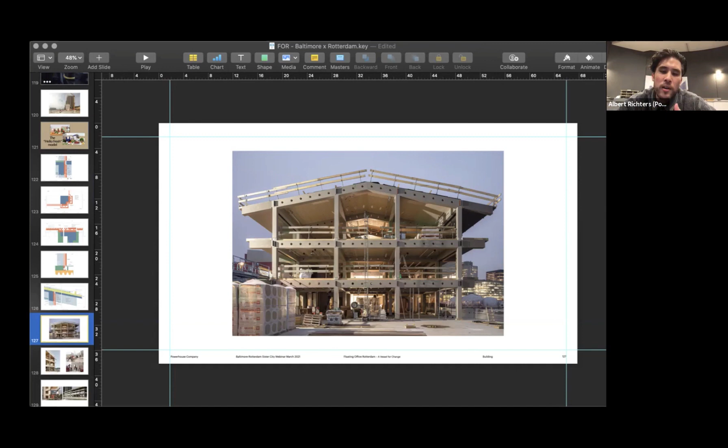Also the color sometimes makes it feel a bit yellowish, and what we decided to do therefore is to gray-wash it, as I said, but the gray wash retains a certain transparency in it, so it basically neutralizes the yellowish color that we just didn't like very much aesthetically, but still you would see the wood behind it. So there is transparency, and definitely when you're on the building site — I'll try to find a picture where you can see it — in the beams you still definitely see the wood as a material. It's just less yellow, basically.

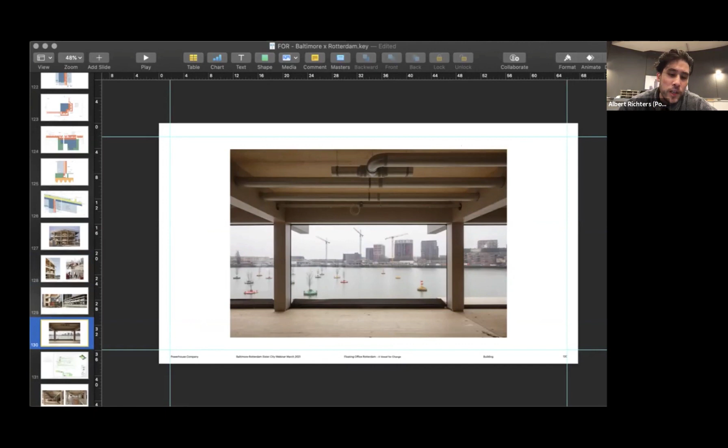Okay. The next question says: you mentioned that symmetry was really important as the building is floating. Were there other structural measures taken to make sure the building would not tip over or break due to imbalance caused by the users?

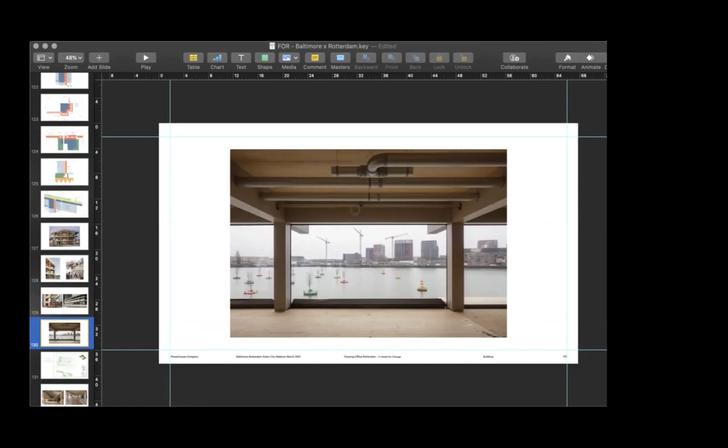By the users. Well, there are plenty of jokes made like, yeah, we have to make sure that we all sit on both sides equally, otherwise the building will start tipping. Well, I mean, we are not as heavy.

So on the water, the quay side, you have the sedum roof, and on the other side you have a solar panel roof, and there is indeed a difference in weight there. We didn't want to have the solar panels on the quay side because it's a public space, people walk there, and there's going to be this floating boulevard, so it fits much more with the atmosphere of green, and it also helps with retaining water. And the solar panels on the north side are much less efficient anyway than on the south side.

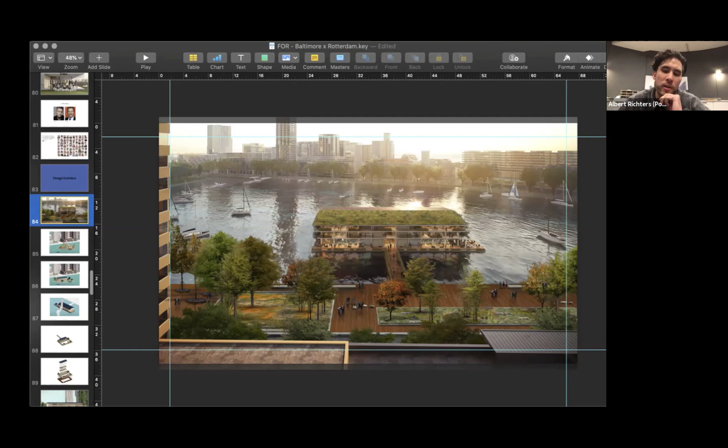So that's why we had this difference, but this difference immediately has an impact on how it's floating. So basically the way it's counteracted is that on the south side of the building, we have this sort of terrace with steps coming down, and the steps are hanging off the concrete structure. Sadly you cannot see it here, but you can see it a little bit. So basically they're hanging off the concrete basin, the concrete foundation, and that hanging counteracts the weight of the grass or the greenery on the other side. So you do have to do it in a smart and intelligent way.

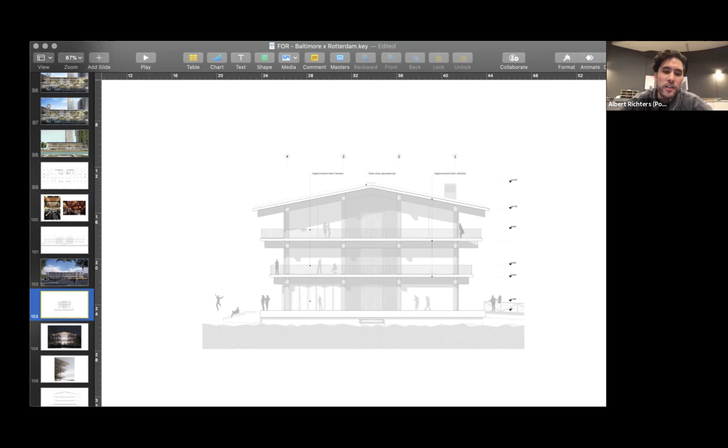So momentarily, basically, the roof is ready. The PV panels are light, and now the stairs are not yet in place, so the building is slanting. Let's say from left to right, it's slanting by 6 centimeters, which is about 3 inches. It's funny that you don't really notice it when you're there, but you do see it, you do see the water line is a bit slanted. Of course, it's going to be horizontal the moment the stairs are placed, but that's not yet currently the case.

Perfect. Well, thank you all very much for your patience, and I really hope that this lecture inspires you as much as it inspired me. And to make sure that Albert gets home before the curfew starts, right, we will have to start wrapping up. 30 minutes, it's gonna be fine. Rotterdam's center is quite small, as I showed. It's the harbor that is huge, but the center is tiny.